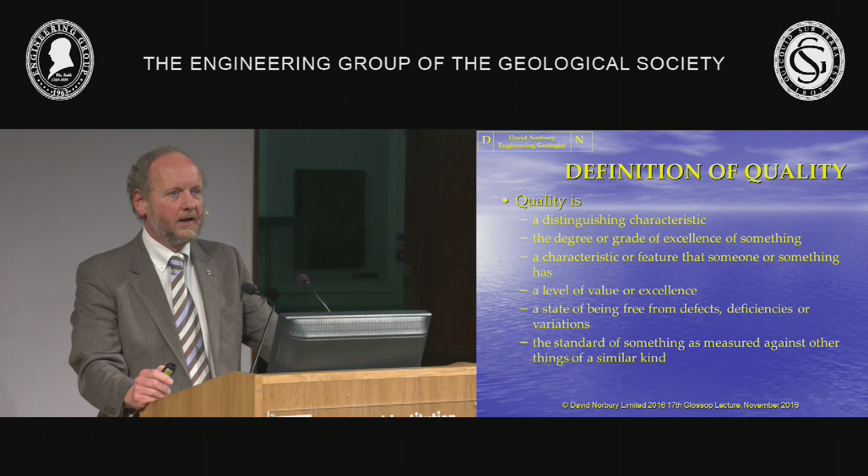Standards are ideas about morally correct and acceptable behavior, something that is very good and is used to make judgments about the quality of other things, a level of quality, achievement, or attainment that is considered acceptable or desirable, a document that provides rules or guidelines to achieve order in a given context, something set up and established by authority as a rule for the measure of quality.

We also have a definition of standards from the British Standards Institution, from BSI, which I will just read out the highlighted bits. A standard is an agreed way of delivering a service which is used by customers and represents the distilled wisdom of people with expertise in their subject. So, in summary, quality is a standard of measurement, and standard is a measure of quality. They're not quite the same thing, as you all know, but they are closely interlinked, and clearly we need to have both quality to maintain our standards and standards to improve our quality.

So these ideas, as I first formulated them, led me to the idea of having a wheel, which I then called a square wheel, hence the title of the talk, of quality standards. So if I create a box which I fill with quality and standards, and then put into it my wheel, the quadrants of these wheels, these threads within each quadrant, are the threads of personal quality, professional quality, technical quality, and standards. And I just want to dwell for a moment on these 4 threads.

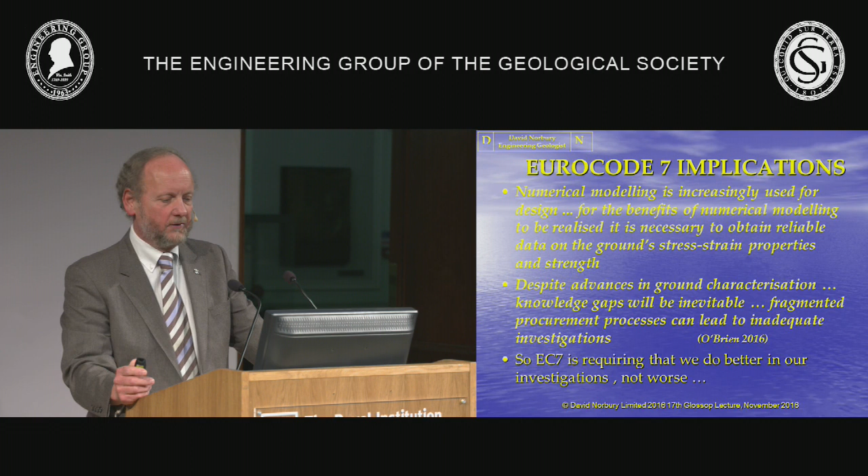What does Eurocode 7 comprise? Well, there are the 10 Eurocodes. Let's not worry about those. But Eurocode 7 has two parts. And there are also the two national annexes. And you can't operate the Eurocode documents without also having open in front of you national annexes, which are the documents that tell you how to actually implement those Eurocode 7 documents into national practice.

There are also the 13 execution standards called up under Part 1. And the symbology on this slide is if it's underlined, it exists, it's been published in the UK, and it is the British standard on that subject. If it's got an asterisk against it, it has been changed since the original publication. And as if there are not enough standards, yes, they do keep on changing, and so it requires you to make some effort to keep up to date.

So, as I commented, Eurocode 7 Part 1 was amended in 2013, and it says so. But make sure you are using the up-to-date version, make sure that you know what version it is, and it is your responsibility to do so. Not only do you have to worry about the new standards, you have to worry about them changing.

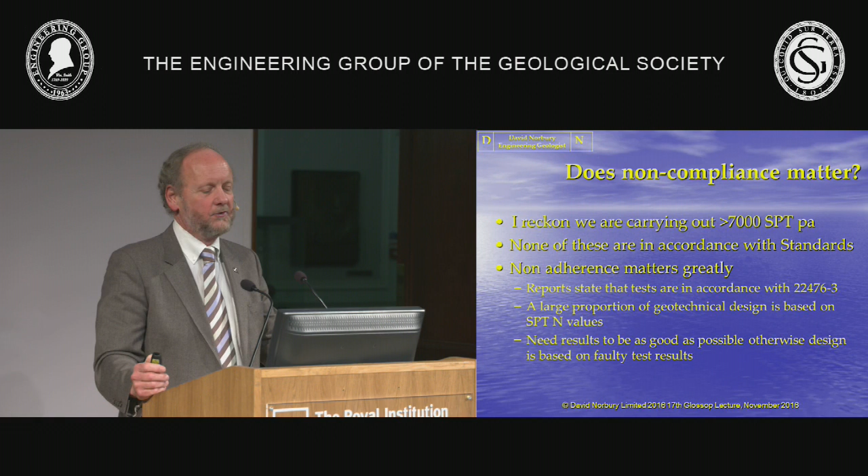So, I've just highlighted 4 standards by way of illustration that we are not implementing all of the standards, and sorry, rock description does come up again. I slip it in at the bottom there. Those are standards we are following. So we're following some, we're not following all.

So where are we with the current state of implementation, and why are we doing it? Well, we can go back to where it all came from, that the implementation of the Eurocodes is basically linked to the Construction Products Directive and the Public Procurement Directive. And what's going to happen to those particular directives following Brexit is anybody's guess, but I suspect they're not going to go away. They're just going to transfer into British law. So they're still going to be relevant.

So Eurocode implementation is actually by statute. So public works are required by law to follow the Eurocodes. Private clients do not have to. They can choose whatever standard they want. And in terms of the drivers for implementation of the standards, to my experience, the suppliers have been the lead, the funders have followed, the clients are lagging behind, and us, the geotechnical industry, well, we might try and persuade our clients, we might or might not achieve something.

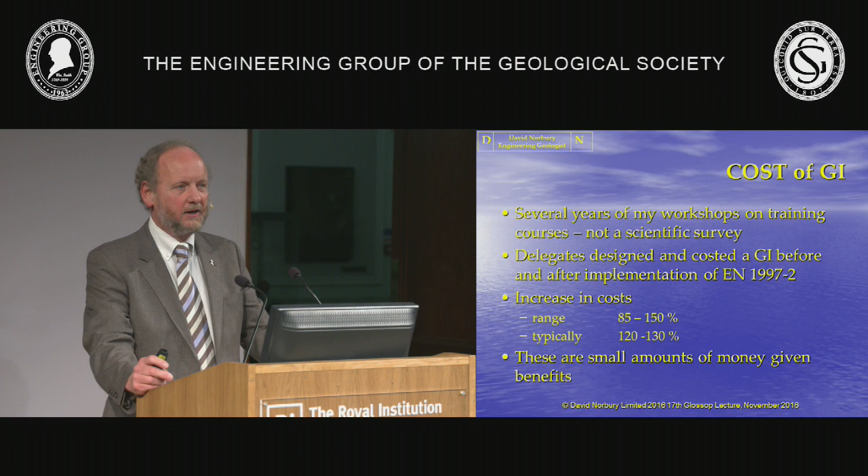I cited a quotation earlier on about standards being at an all-time low. Those respondents actually went on to say in the next breath that they would also be more than happy to pay a premium of 20% provided they could see an improvement in quality. The concurrence of the 20% figure on these 2 slides is purely coincidental. But there we are, if we think that Eurocode 7 is going to push the price up by 20%, and the consultants are saying that's a price worth paying, what's the problem? But let's think about this 20% a bit further.

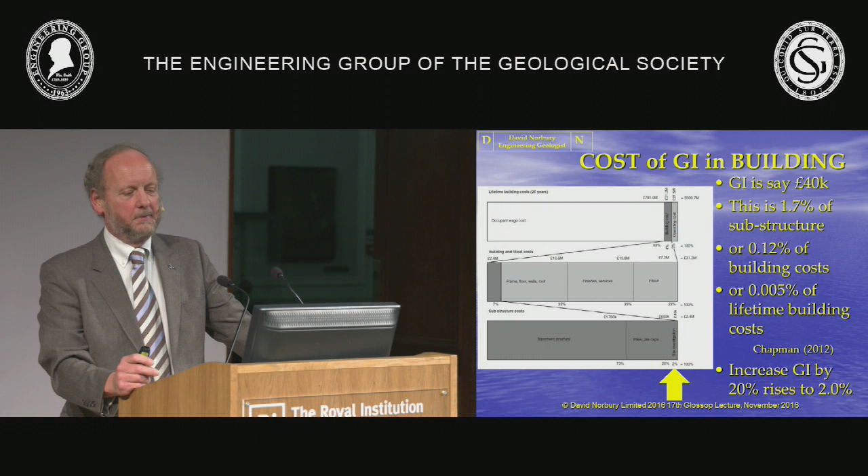Tim Chapman figures for the cost of a building investigation, published in 2012. If we have a building in a city for which the ground investigation is, say, 40k, that amounts to 1.7% of the substructure cost, not the whole building cost, but just the bit below ground. By the time you get to the whole building, we're down to 0.1%. Negligible for the whole building costs. If we now increase the cost of that investigation by 20%, that 1.7% figure rises to 2%. Still piddling. Yet we're going to get a much better result.

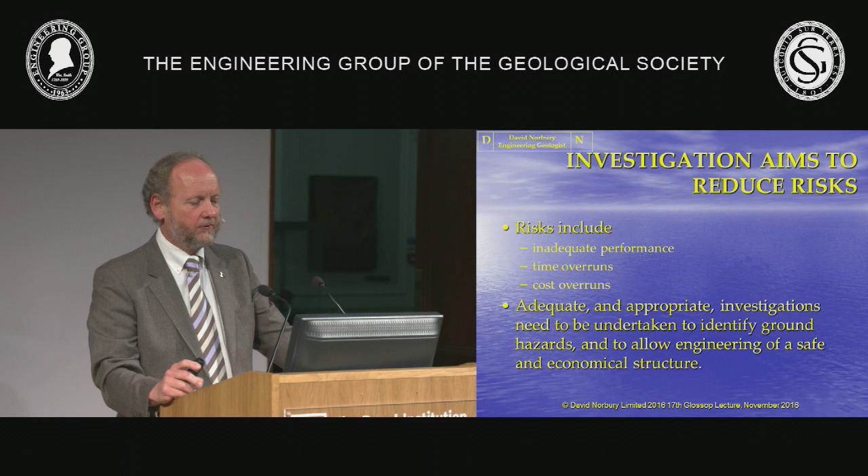So the aim of our investigation is to reduce the risks. And the risks in this context include inadequate performance, overruns in time, and overruns in cost. That's actually what matters to the client, not just how clever we have or haven't been. So adequate and appropriate investigations need to be undertaken to identify the ground hazards and allow safe engineering. Eurocode 7 has explicit requirements. You have to do the desk study. You have to do a site walkover. And once these are done, you can plan and execute phased investigation with review and update loops, and then continue investigation through and beyond the construction.

There's also suggestions within Eurocode 7 about the intensity of investigation. Spacings and depths. I'm not going to go through the numbers. But on depth, that the investigation shall go to at least 5 or 6 meters below the deepest part of the foundation. Piling contractors would love it if they didn't have to guess the ground conditions. We're not following these standards.

Now, these spacing and depth are informative suggestions. But the UK National Annex says on this matter that these recommendations should be treated as a minimum, only relaxing where there is sufficient previous knowledge, and that you should state that in the GIR, in the report. Are you doing that? Are you considering that these spacings, these depths, are the minimum requirement from which you're building your investigation intensity? That's what the standard requires you to do. That's what the National Annex tells you to do, and that is part of the standard.

Too many investigations are planned by non-specialists. I'm still horrified at the number of investigations I see where a contractor has received a request to do 4 boreholes, 3 pits, 2 tests, whatever it is. And that scope has come from the client. What does the client know about geotechnical or ground investigation? Probably not very much. So in many, many investigations, the wrong questions are being asked of the investigation.

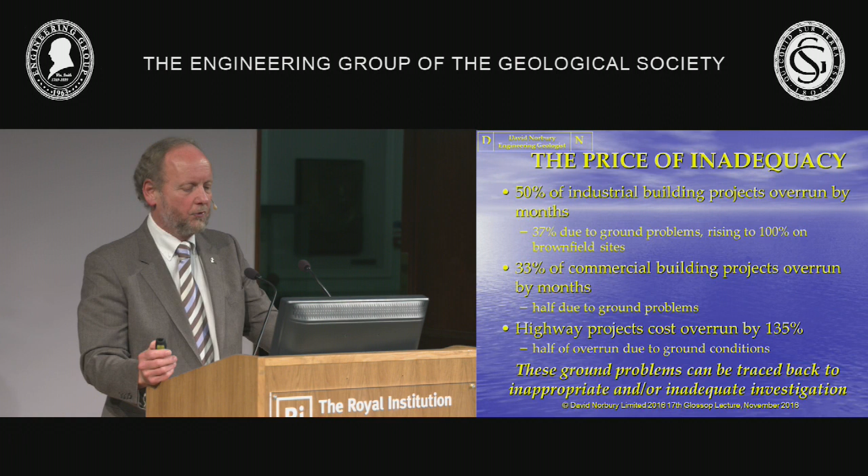What is an inadequate investigation? It's the encountering of unforeseen but foreseeable conditions. So stronger rocks, weaker materials, more fractured materials, less fractured materials. Differences in the weathering, both degree and extent. Groundwater, that's the most common one of all, and cavities.

And I'll share with you a quotation from somebody related to the Carsington Dam forensic investigation, which I'll be talking about shortly. As that forensic investigation started, a statement was made in the local press to say that the forensic investigation was looking for something. It's difficult to say what it will be until we find it. When we come across it, we'll know what it is. But if we knew what we're looking for, we wouldn't be looking for it. I've had that quotation in front of me since 1984, and I still don't understand it.

So what is an adequate investigation? Well, I've just demonstrated the expenditure on investigations is low, 1 or 2%. And adequacy, even within that budget, is reducing the uncertainties to an acceptably low level. And here I show another quotation, rather more ordered and understandable, from Mr. Glossop himself in his Rankine lecture. If you do not know what you're looking for in an investigation, you're not likely to find much of value. And with that one, I completely understand what he's saying, and I completely agree with him.

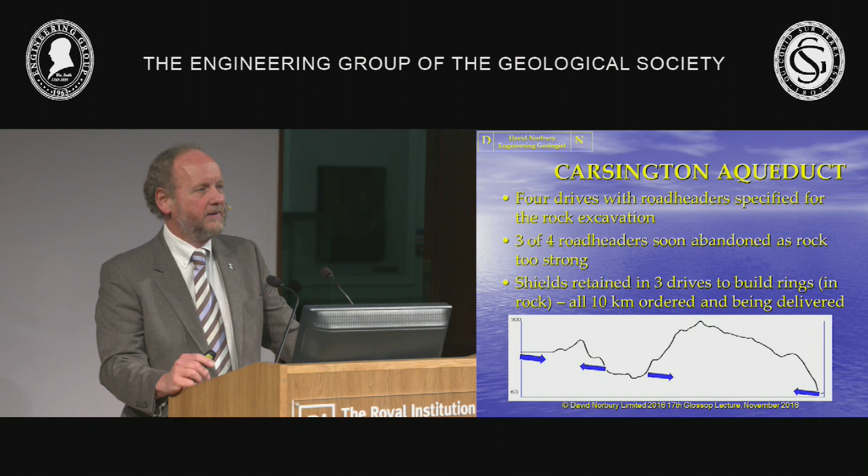The geology was partly understood. It was fascinating. It was glorious. Sorry about the engineers. This geology was absolutely amazing. We went right through a delta, right from the back of the delta, so the shallow water sandstones, right through to the deep water mudstones, and everything in between in 10 kilometres.

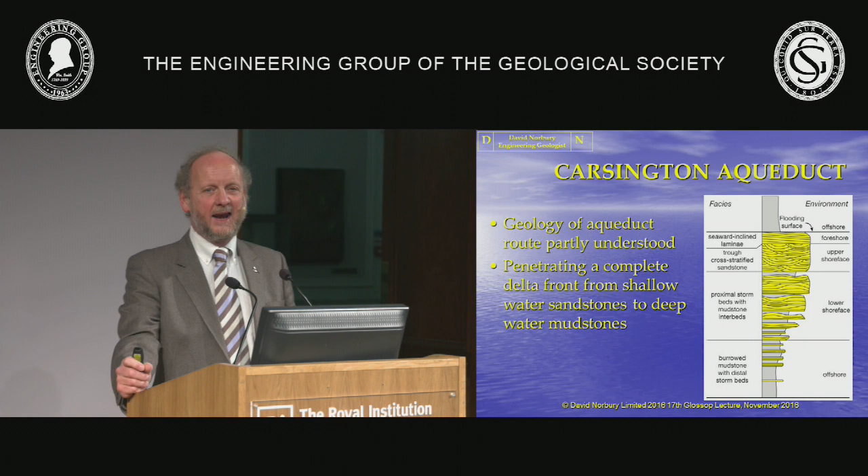Wow, fantastic. So we had sandstones, varying, but particularly ranging up to very strong gritstones. We had mudstones, which were both medium-strong mudstones with open joints, yeah, the joints open up to about 30 mil, and also were very weak and squeezing. Big range. The faulting patterns and their effects on the groundwater were poorly understood.

And if you're down 100, 200 metres below the ground and you've got 200 metres head of water as a miner, you'd quite like to know what's on the other side of the fault, wouldn't you? And that's actually what we spent a lot of effort trying to sort out so that we didn't have nasty surprises. And the ground was intersected by growth faults.

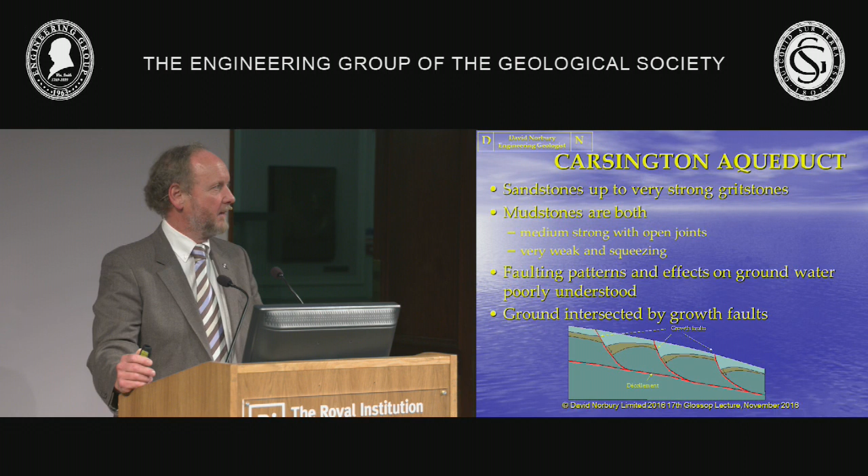And the diagram there is to illustrate that growth faults look remarkably like slip surfaces, which is exactly what they are, still picked up by tectonic movements subsequently. So the point is that the faults are curved, they're not 60 or 70 degrees, and they go to a basal décollement level. Fascinating stuff. Not new, even at that time. How many of you have ever heard of growth faults? You don't have to answer that.

Okay, so for the aqueduct, the desk study was done. An investigation was done. Was it targeted at the right geology? I'm not going to answer the question, but that's just the question I pose. But bear in mind that after the construction started, we had to carry out additional investigation, which was at least as much again as had been carried out in advance.

We were having to drill and blast in the sandstones because they're just too strong. We were having huge quantities of grout in the mudstones because of these open joints. And several times we actually almost lost the tunnel because of the squeezing forces on the shields. So pretty wide range of conditions.

And in fact, completely unexpectedly, we also hit that basal décollement layer for about 1 kilometre in the tunnel. It was like a hall of mirrors. It was glorious. All these polished surfaces with 200 metres head of water on it. Fastest production on the job. 1 stick, 3 metres pulled. Fantastic. Anyway, the tunnel was eventually completed, several years late, and the cost was never revealed, hidden away in contractual claims.

So, the standards at the time were followed. The execution of the GI was satisfactory. The scope was insufficient. The geological context was misunderstood. The ground model was poor. Erroneous conclusions were drawn. And previous experience in this geology, after all, there have been lots of tunnels driven in Derbyshire, experience in this area was poorly remembered. Not very good, was it?

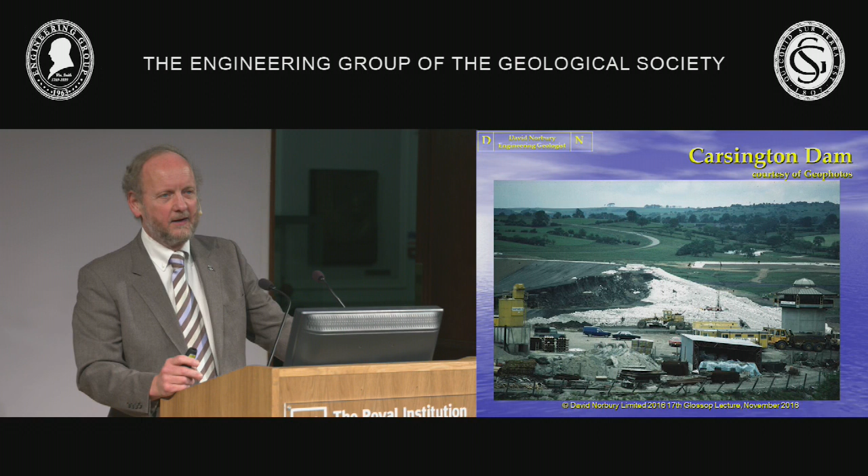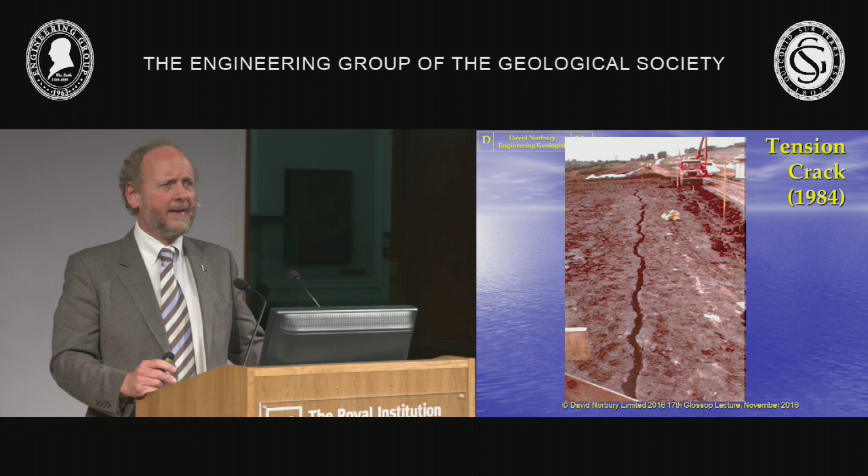So, as far as I'm concerned, this all started off with a tension crack forming in 1984. I'll come back to the history in a moment. And this is just another illustration that tension cracks like this, failures like this, always start at weekends. I don't know whose law that is, but it's a real one. So, this tension crack started at the weekend, quickly got a bit bigger, and got bigger. So this is the back scarp. That's that tension crack 10 days later.

So there's the failed dam crest, now looking down onto it. So we had a 15-meter vertical drop. So we've got some of the dam crest down there that the rigs are on, some of it up at the right, and the toe of the dam had moved out 5 or heading for 10 meters laterally. That's a failure.

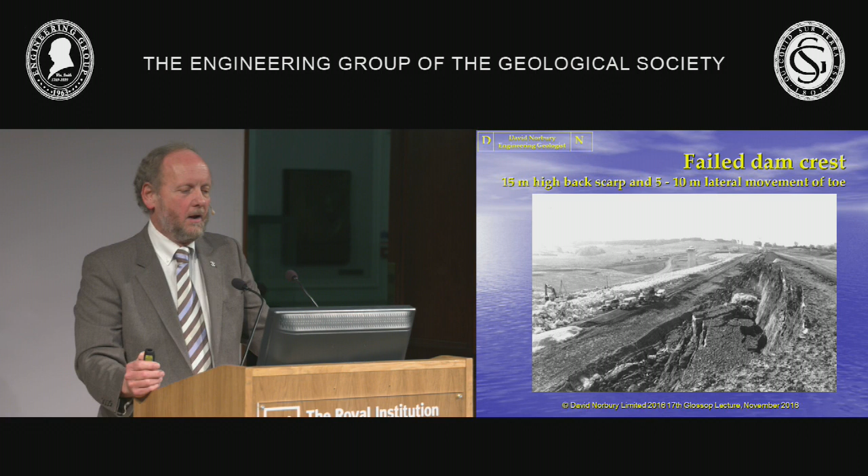This actually wasn't new. The actual movements started at least one earthworks season earlier, where the contractor initiated a remedial profiling, toe loading of the dam to try and stop the movements, but that all became history with the 1984 collapse. So we were commissioned to start a forensic investigation of the collapse, mapping the deformations within the bank, investigating the ground beneath the bank, and recording the ground conditions out with the bank.

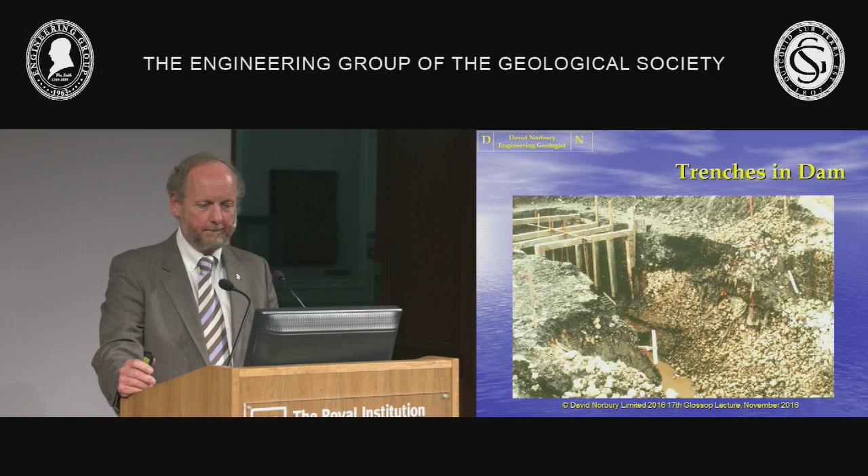So, logging the internal structure, geologist heaven. Look at all those things you've got to map and record. Fantastic. Fill, limestone, natural ground, whatever. We also carried out trenches through the base of the dam to look at the area where the slips had taken place, through the base of the fill and through into the top of the natural ground underneath. We're finding shear surfaces, not particularly difficult when they're that clear and striated.

We carried out real boreholes. Okay, that's a 250 millimeter diameter piston sampler. Have any of you ever used that? Fantastic. But it gives you a high quality sample. And there you are, you can map the shear surfaces higher up within the dam failed bank profile.

We also carried out trenches out in the natural ground. Here we see a young Tim Spink looking for shear surfaces. That's right, I was young then as well.

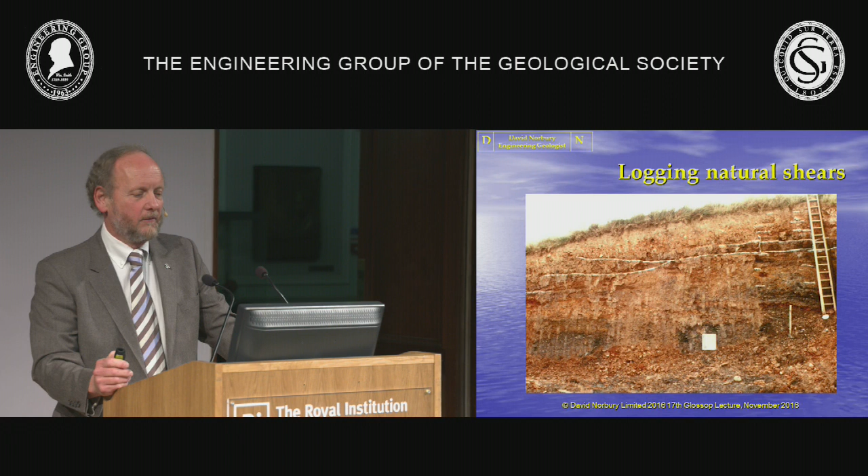And mapping the shear surfaces in exposures. Yep, that shape's familiar to several of us, all of us, whatever. And recording the presence of gleyed shear surfaces. Lovely stuff. But there's nothing new in these features. Yeah, they're fantastic, but there's nothing new.

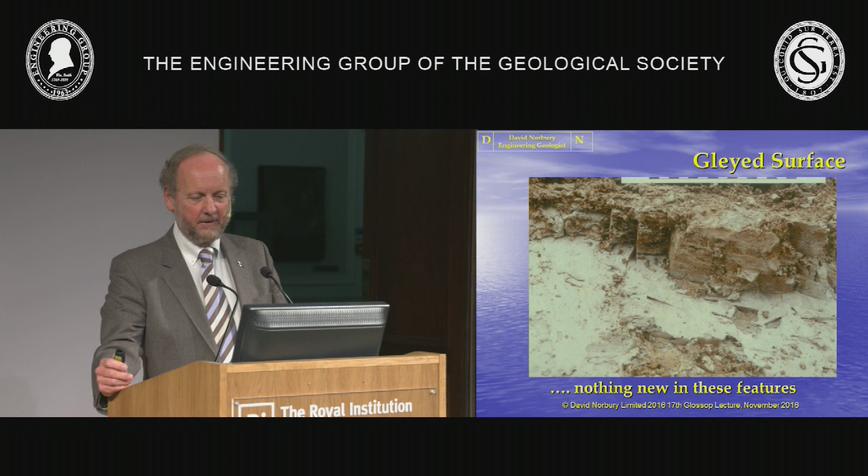They're also present when Walton's Wood failure took place back in 1961. This is construction of the M6. And there you are, some thin sections through the shear surfaces, very clear to see, and when you look under the microscope, you can actually see the realignment of the clay minerals. So nothing new. In fact, the nothing new went back even further.

If we go back to 1937, the Chingford failure, the reservoirs now known as Sir William Girling reservoirs, where a slip occurred during construction, fortunately also before any water had been stored. And the failure surface was found there to include a periglacially sheared head deposit, yellow clay. In fact Skempton and Bishop were called in, Terzaghi was called in, and so this failure actually probably was the tangible birth of soil mechanics in this country, both the science and the company.

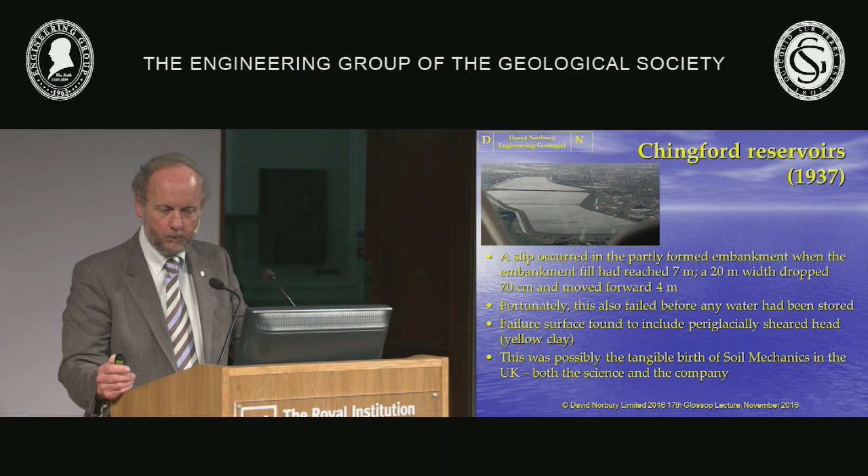Coming back to Carsington, that is the cross-section of the dam as intended, and you can see nothing particularly untoward about it. There's a rather odd-shaped clay core with a boot, which was specifically to get the grout curtain away from the centre line of the dam, but gives an odd effect, particularly when we realise that the yellow clay also existed at Carsington, and that was Skempton's first remark when I met him on site: they've left the yellow clay in again. Yellow clay was left in underneath the bank. So there you can see a very clear preferential slip surface waiting to happen.

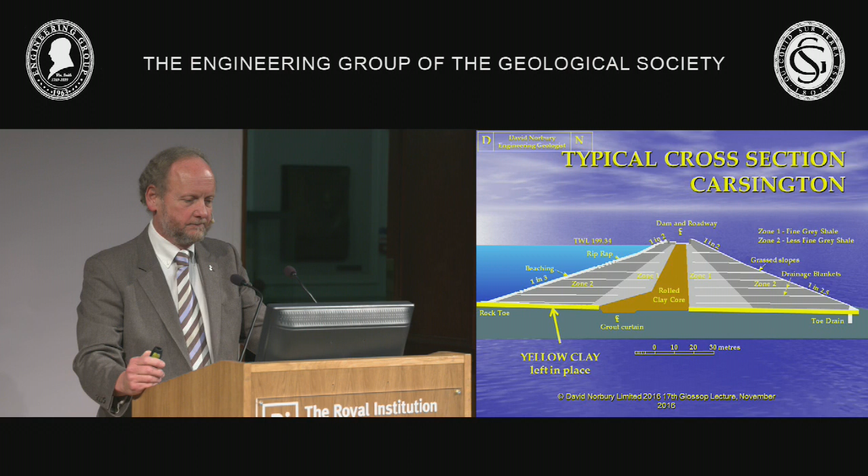That's exactly what happened. So the causes of the failure of the Carsington Dam, and these are from a paper by Kennard and Bromhead: limited geotechnical input, too few strength tests, unrealistic surfaces analysed, instrumentation data not utilised, and the dam incorporating an oddly shaped core, maximising the length of potential slip through the comparatively weak element, and the yellow clay was left in place.

So, Carsington Dam: training, precedent experience was lost. The ground model was flawed because the yellow clay was not understood and it was left in place. The internal shape of the embankment. Procedural failures, the warnings from progressive failure were ignored. The cost there, again, I don't know what it is in pound notes, but basically the whole bank was taken down and rebuilt again. Long delay, big cost to client.

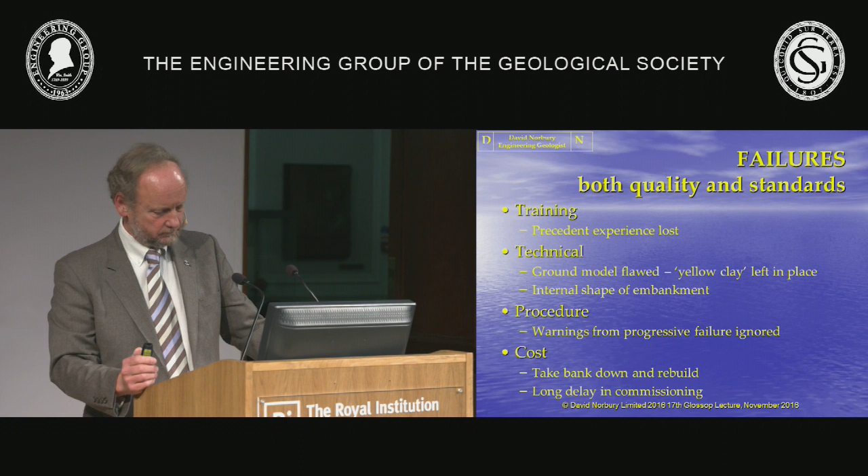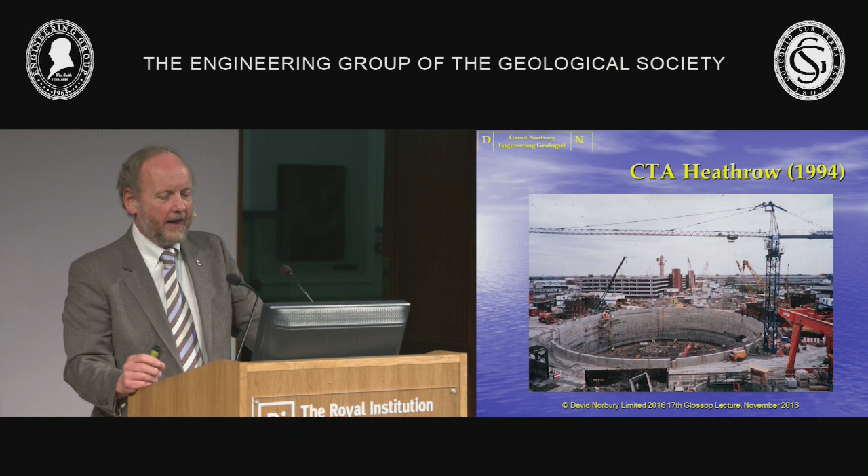Coming a bit closer to this lecture theatre, Heathrow, when the Heathrow Express station was under construction in the central terminal area, so between terminals 1, 2 and 3, back in the mid-90s here. These underground works were being excavated and supported with a sprayed concrete lining, here concrete being sprayed, and a sequential excavation to enable construction of the lining, to build up to getting the circular profile and its support step by step.

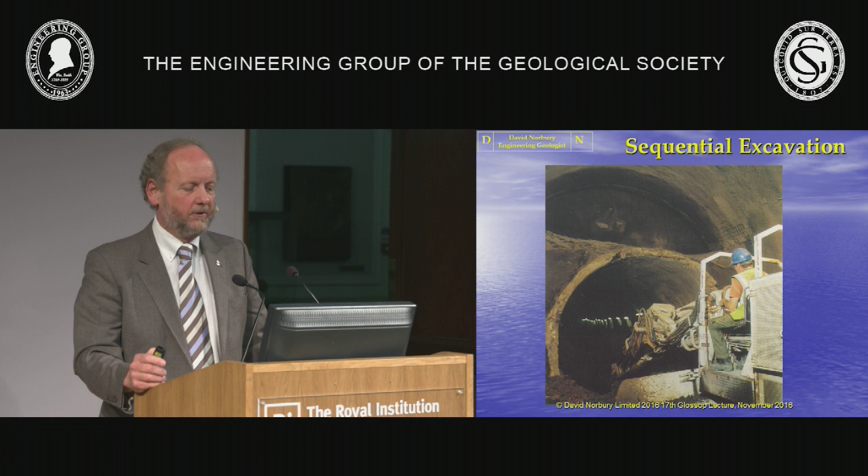And so there it is, the tunnel's under construction, lovely job. It had got to the point of the access shaft, and a couple of the two running tunnels had started. The concourse tunnel had also got underway. Got about that far at the time of the failure. Oh dear, tunnel no longer under construction. Fortunately, the failure happened slowly enough that actually all the workers could walk out. So nobody was hurt. Whew.

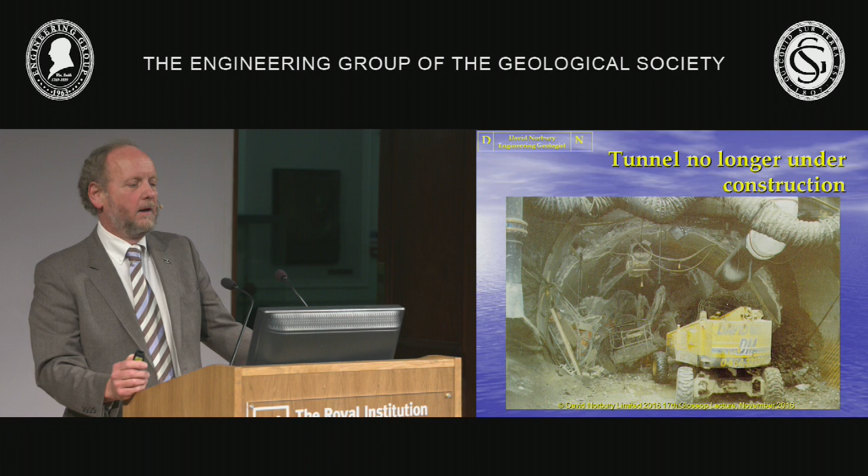I repeat my comment about public exposure. This time I'm standing in the Terminal 3 car park. And you don't need to be geotechnically minded to realise that something's not quite right. Particularly since actually that weekend you couldn't get into Heathrow because the access roads, and particularly the tunnel into the central terminal area, were full of lorries delivering concrete to try and stabilise the failure.

So here we are with the remedial works, and we see the main rescue cofferdam. That's much bigger than the original shaft, under construction there, and the two running tunnels with shafts down to them to enable their construction to recommence. And our brief was to carry out a forensic investigation of that 35-metre cofferdam.

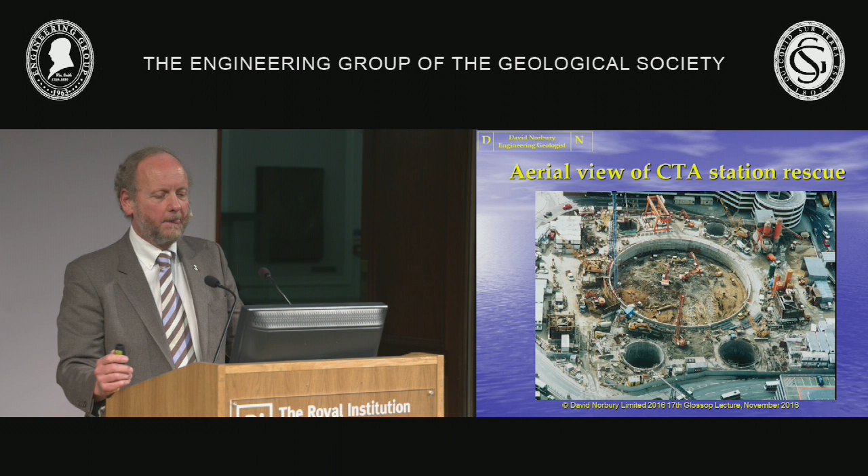Right. Also, we carried out logging of the tunnels when we got down there, and this, I believe, certainly was a first at the time, and I don't think it's been gainsaid ever since, is the only time that logging of the tunnel has been carried out from the outside in. Okay. But there we were, logging the tunnel, the concrete, and up to 7 different types of concrete being identified.

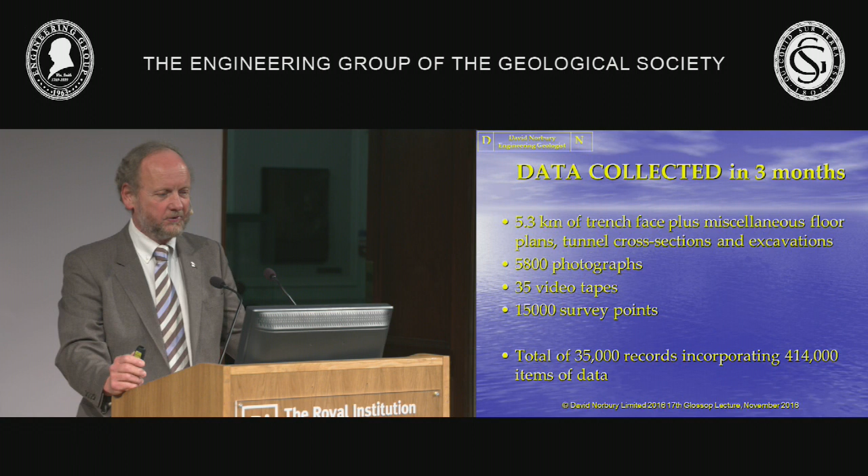And we worked on this for about 3 months, and we logged about 5 kilometres of trench faces, plus exposures, cross-sections, and so on. Took a few photographs, videos, took a lot of survey, and basically collected about 35,000 records, which included about 400,000 items of data. It's not bad in working 24 hours a day, but that was the task. That's what we did.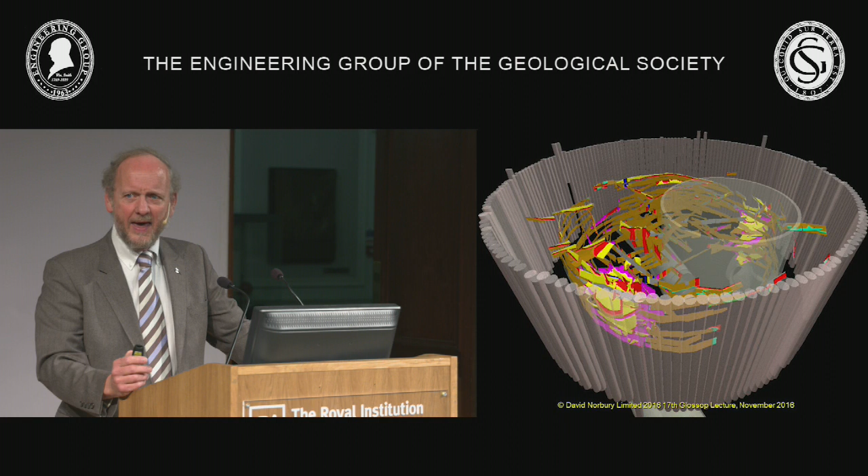So, because of the particular contractual arrangements there, the project was centrally insured, so there were no major contractual claims, but the Health and Safety Executive were unhappy, and as a result, they prosecuted the contractor and the consultant, and back there in 1999, the Health and Safety fines were £1.7 million for failing to provide a safe place of work. So significant penalties there.

So the reasons for the failure, well, actually, they were never publicly aired, because it never went to court. There's no technical reconciliation of what had been found. The engineering geology is well understood. Well, it's terrace gravel over London clay. It can't be much more complicated than that. But the anomalies weren't investigated.

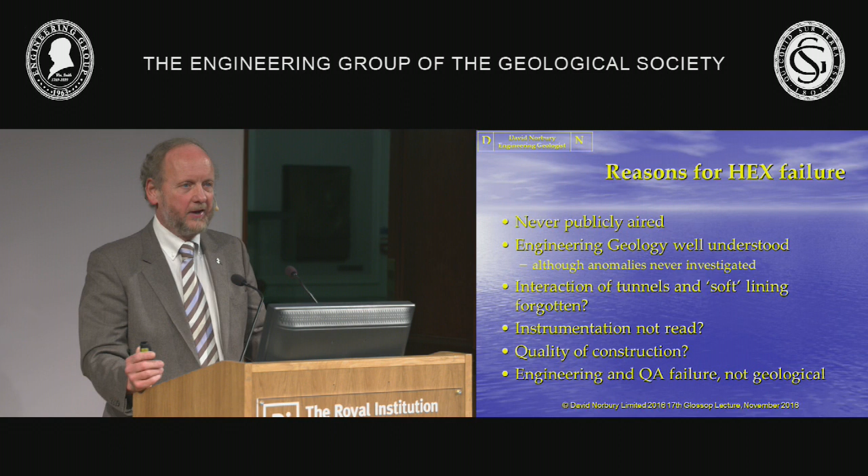The interaction of the tunnels, less than a diameter apart, particularly in the context of their comparatively soft sprayed concrete lining, was forgotten. There was a lot of instrumentation in. It wasn't read. The quality of construction was poor. And in fact, this wasn't a geological failure. It was an engineering and quality assurance failure.

Or more particularly, the sprayed concrete lining: the strength of that sprayed concrete was appalling. A lot of it went off for test, and most of the test results came back as null, too weak to prepare a specimen. Nobody noticed that.

And actually, because of that quality, a lot of the sprayed concrete lining needed to be remediated, and by taking it out, they lost the hoop support that by then had been constructed. There's a significant lack of awareness of the critical elements in a sprayed concrete lining construction. The various bits of the reinforcement need to be connected together.

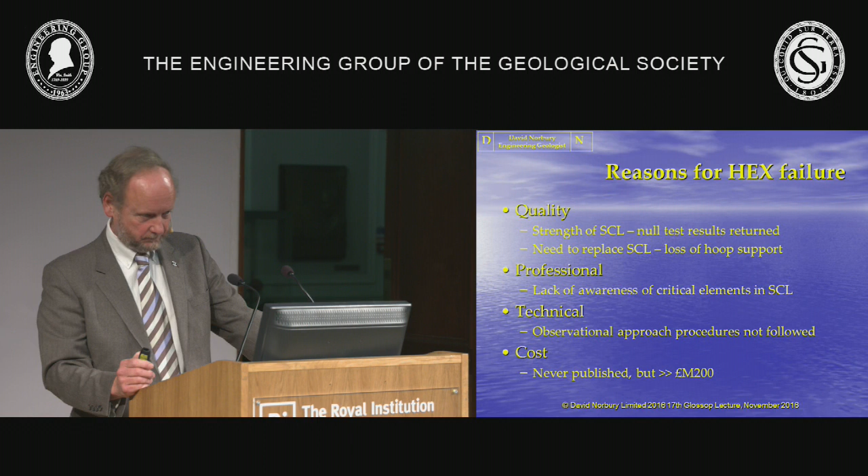Okay, and the observational approach was clearly not followed. And again, the costs weren't published, but from contemporary records at the time, it was well above £200 million. And actually, the delay wasn't too great. The delay was a small number of months, but it required a lot more effort to get there on time.

And finally, just an example of tunnelling in the chalk. Sorry, Rory, I did say I wouldn't mention chalk, but I've forgotten it crept in here somehow.

CIRIA 574, chalk classification, concentrates on fracture spacing and aperture for very good reason in underground works in terms of the prediction of the groundwater conditions that might obtain within the tunnel. So a drainage tunnel was under construction, and there was a large unexpected increase in water flows and thus costs, and relogging of the cores resulted in a doubling of the number of fractures recorded from those cores.

So here we had a case that was purely and simply a failure of site investigation practice, with the standards not being followed, and in this case, that poor logging resulted in a cost of the order of £15 million. Just from the standards not being followed.

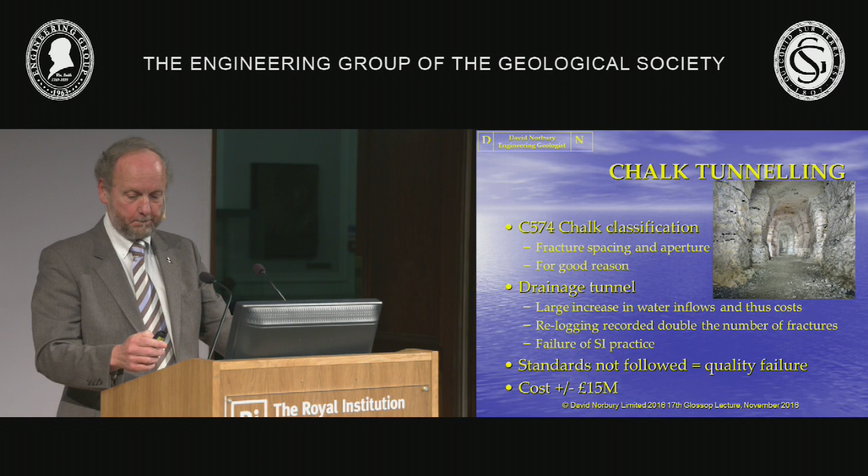So, those 4 case histories. The engineering geology was poorly understood in 3 of them. Training was inappropriate in 3 of them. Precedent experience forgotten was in 3 of them. Standards weren't followed in 3. Construction quality and supervision was poor in a couple, and the quality of work was poor in a couple. And in fact, you could actually take this definition of quality slightly higher and say it's poor in all 4. I'll discuss these issues in a bit more detail in the written paper.

So in these cases, the requisite quality and standards were not achieved, and as a result, safety suffered, reputations were damaged, projects were delayed, costs increased, and litigation was possible. And that list I've lifted from Eddie Bromhead's talk to Geotechnica earlier this year. Any one of these outcomes is a high price to pay for not achieving the requisite quality and standards. So there we are. We've got 4 case histories where things have gone wrong, and basically it's a disaster for a variety of reasons, not least just the project itself.

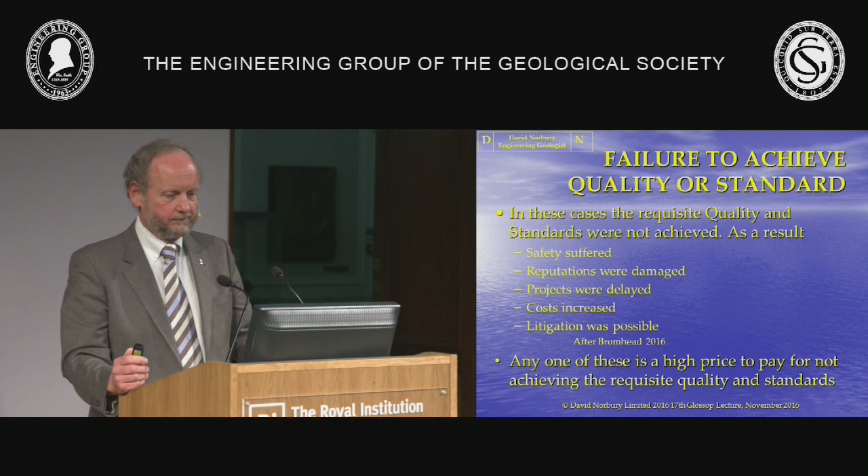So the current position. We all know that you pay for a site investigation whether you have one or not. And most geotechnical engineers think that clients worry more about the budget, the cost of their investigation, than the time or the implications of unexpected ground conditions. The cheaper the site investigation, the more risk there is. That's obvious. And we have to achieve a balance between the cost of the investigation and identifying the risks. And as I've illustrated, we need to improve our communication skills and the relevance of our message to our clients.

So coming back to the wheel. We need all the threads in place. The education and training and chartership and ethics and using the technical guidance and following the standards. All 4 of those threads need to be in place if we are going to fulfill our quality, standards, and standards obligations.

And that means taking on board the requirements and the ethos of all the standards, uppercase, and standards, lowercase, not just the ones we like, so that we can meet our professional standards, satisfy our ethical codes, protect our professional indemnity, and improve our standing in the eyes of our clients. And hopefully, once we've achieved that and negated the quotation I gave you earlier, we can also hopefully improve our own view of ourselves.

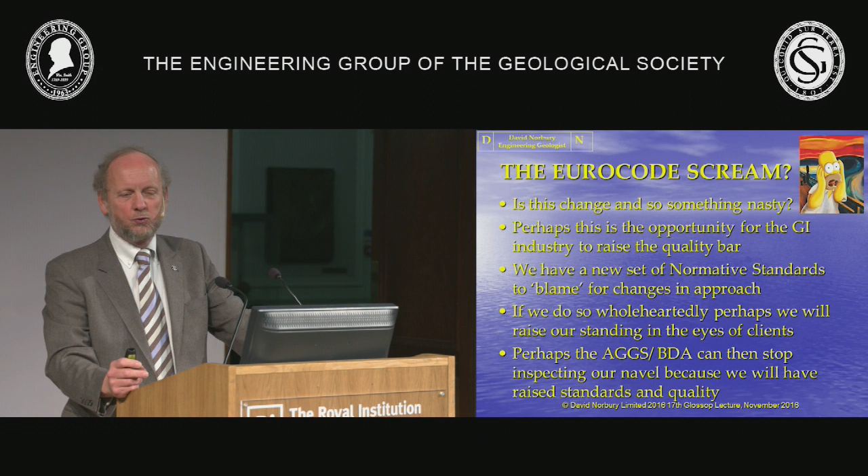And I believe that if we embrace these and do so wholeheartedly, we will raise our standing in the eyes of the clients. And perhaps then the AGS BDA can stop inspecting our mutual navel because we'll have raised the standards and our quality. So it is not the Eurocode scream, I believe. If we follow and use the standards, we should be able to achieve high quality.

So I implore you all, and all your colleagues, to go out there, read the standards, understand them, implement them, to aim high in our standards, lowercase s, and therefore achieve high quality. And in order to do so, we do actually need to believe in ourselves. So that's your mission, ladies and gentlemen, and good luck with it.